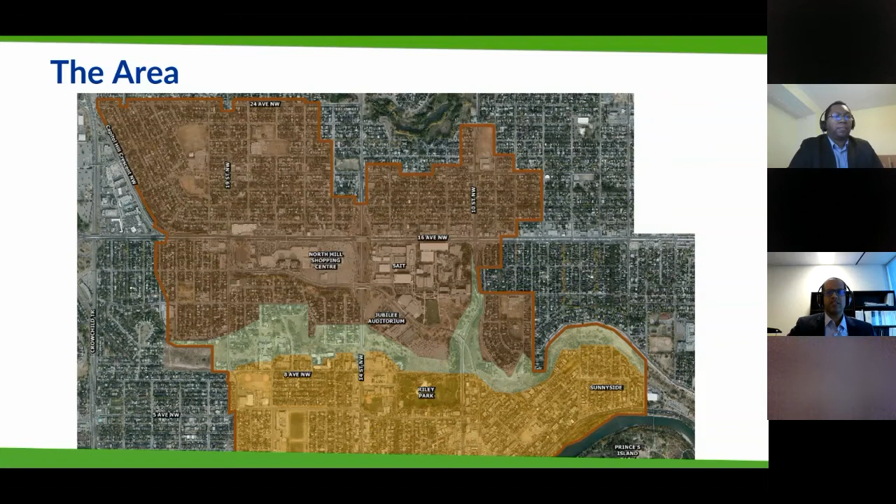This is a large study area within inner city Calgary. It is located just north of downtown, north of the Bow River. The darker shaded area is referred to as the Upper Plateau. The lighter shaded area is referred to as the Lower Plateau. The Lower Plateau lies within the floodplain of the Bow River. The 2 areas are separated by approximately 35 to 40 meters in elevation.

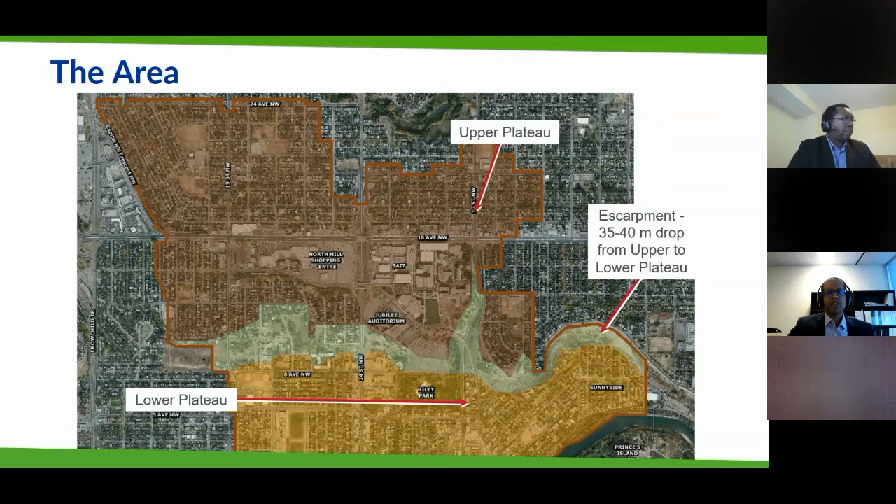Within this study area, the Upper Plateau collects stormwater from an area of approximately 300 hectares with a peak flow of approximately 20 cubic meters per second for the design event. The Upper Plateau conveys stormwater via underground infrastructure that then runs through the Lower Plateau as storm ducts. However, the Lower Plateau's local stormwater system is also connected to the same infrastructure.

As a result, when this system is overwhelmed, regardless of whether the runoff came from the Upper Plateau, the Lower Plateau is the area that incurs the flooding. As the Lower Plateau is within the floodplain of the river, this stormwater infrastructure is also exposed to varying river levels.

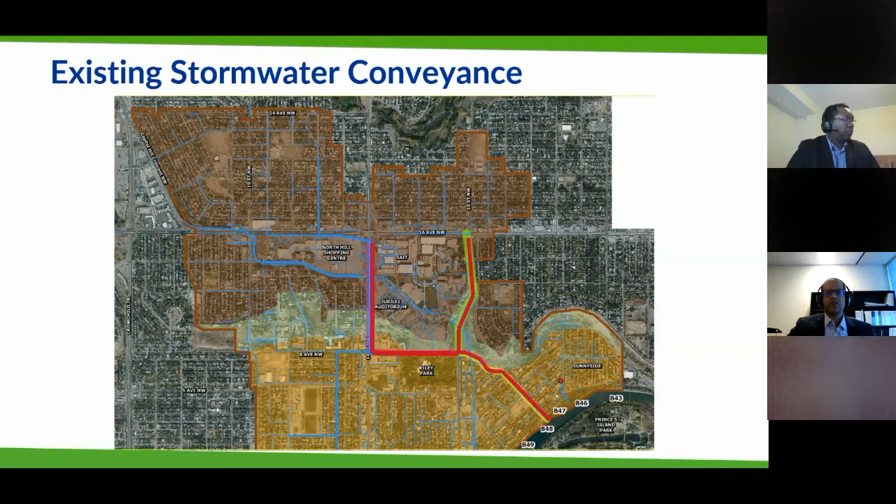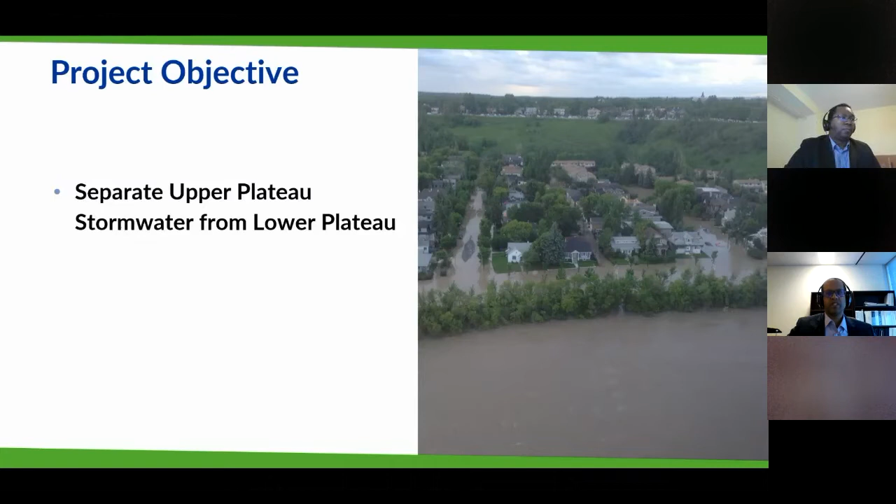The project that we're discussing today had a very straightforward objective: separate Upper Plateau stormwater from the Lower Plateau. It's a challenging objective to achieve, though, given that we're working within the inner city, and one we have been working closely with the City of Calgary to attempt to resolve.

A number of years ago, we were fortunate enough to conduct a drainage study of this entire area. Within this drainage study, we proposed a design solution consisting of a large diameter storm trunk siphon installed via tunneling to convey the flow directly to the river before it could impact the Lower Plateau storm system.

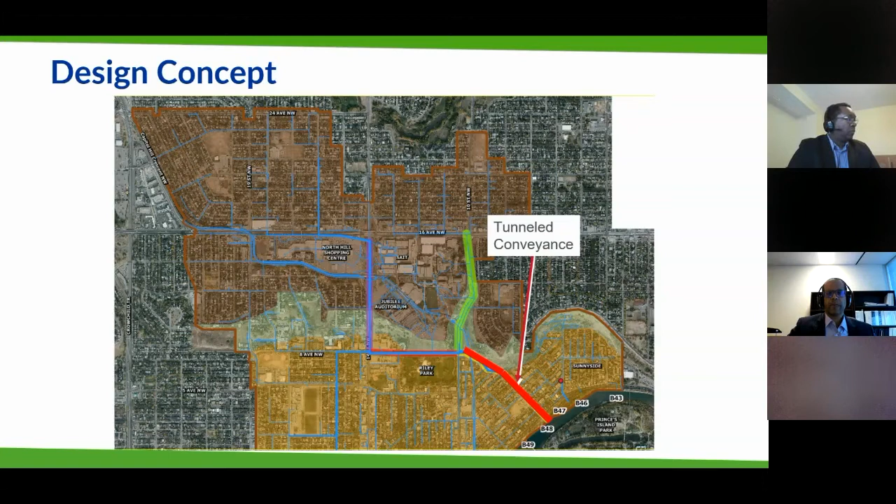During the preliminary design phase of this project, the City of Calgary led a value management session during which multiple potential solutions were raised. An alternative conveyance route for the Upper Plateau flow was considered. However, this route required a much longer installation and required construction of large diameter storm trunk through congested residential areas. This option was deemed too costly and challenging to proceed with.

Storage of the peak flow was also considered. However, the optimal location to implement this storage would be Riley Park, a highly valued public space with many recreational uses and no replacement areas in close proximity. This solution was not carried forward due to the significant social impacts associated with it.

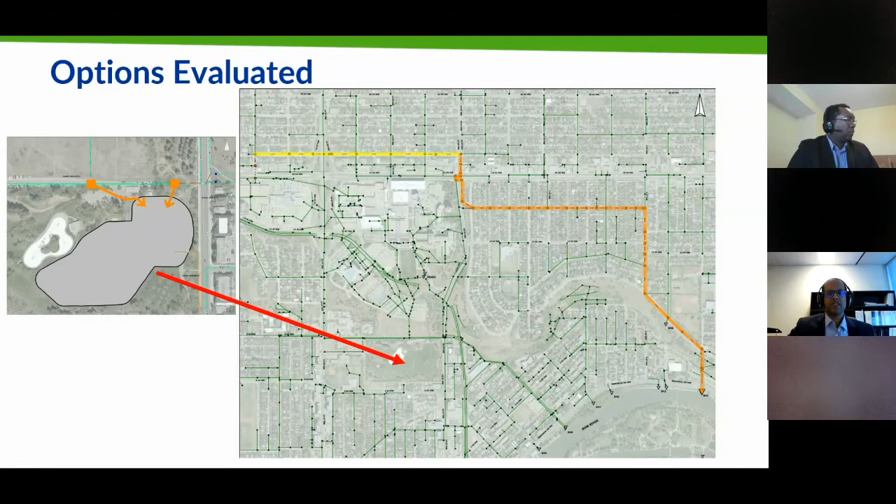Two very different trenchless approaches were also considered. One was to utilize the existing storm ducts to convey the Upper Plateau flow directly to the Bow River while building a new collection system for the Lower Plateau. As Gabriel will touch on in greater detail, this approach would require pressurization of the existing storm ducts beyond what they were designed to withstand.

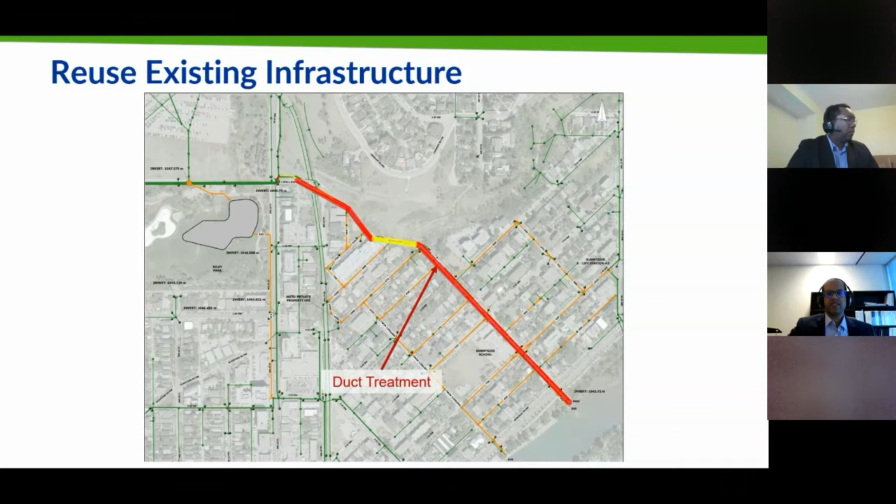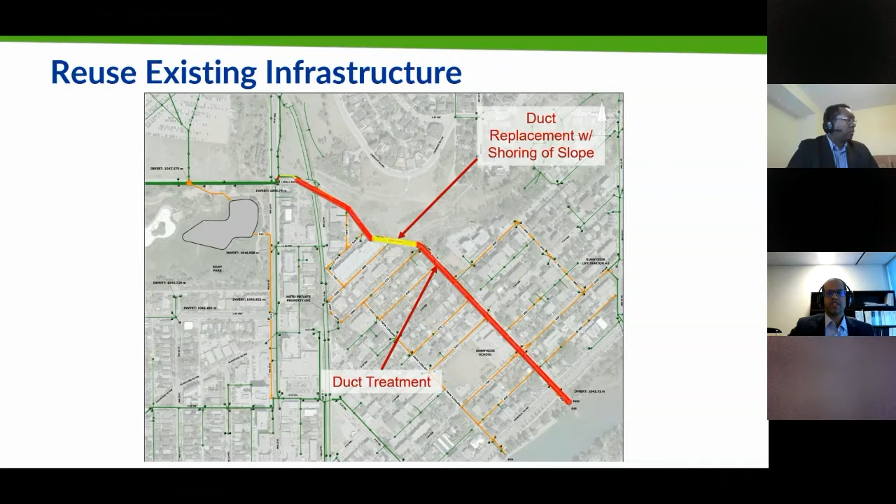This would require treatment of these ducts, shown in red, and replacement of portions of the duct, shown in yellow, and also significant construction within the Lower Plateau system to reconstruct the local collection system, as shown by the orange lines on the screen.

The other trenchless option we considered was an optimization of the trenchless installation of a new storm trunk siphon to convey Upper Plateau stormwater directly to the Bow River. The size of this line is hydraulically dependent, but would be approximately 3.4 meters in diameter to convey the design flow. As a result, this line would have to be installed via tunneling, as none of the available routes had the space needed to accommodate this large a storm trunk through open cut excavation.

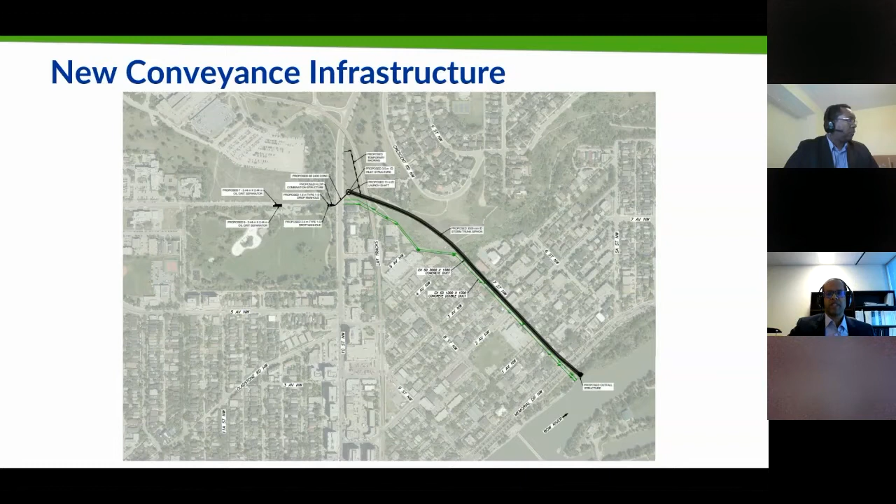Deepening of the storm trunk at this diameter, and then with a length of approximately 750 to 800 meters, we considered tunneling and microtunneling as viable options. A little later on, Gabriel will discuss the specifics of these approaches we considered. At this point, I'd like to hand it off to Gabriel to continue on with the presentation.

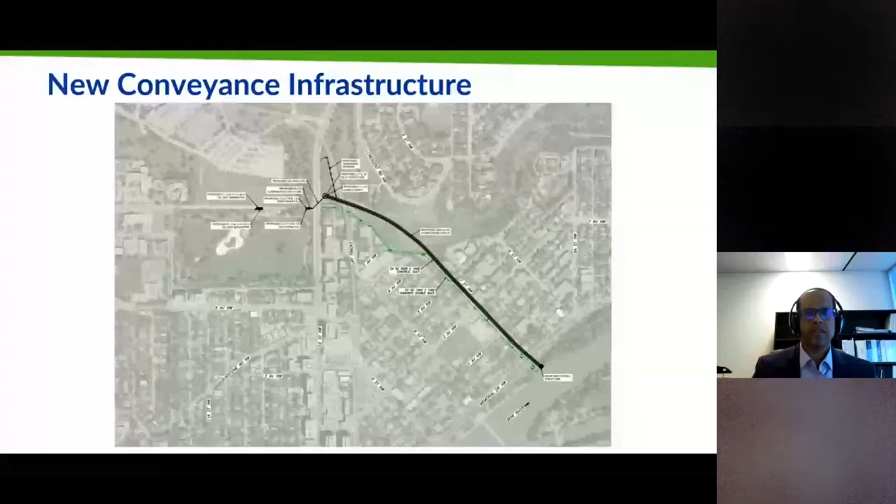Thank you, Nadeer, for reusing the existing ducts as part of one of the options that Nadeer noted earlier. Yeah, sorry about the technical delays here. We'll get this going here, and just appreciate a little bit of patience.

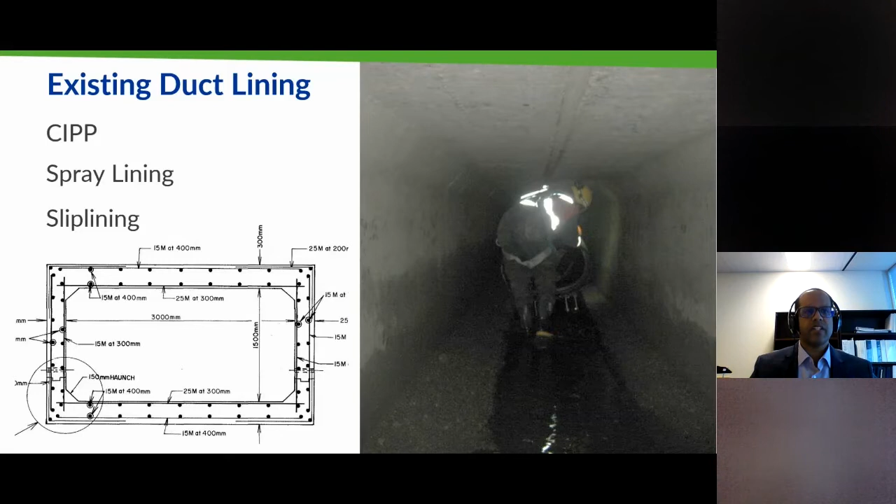Thanks, as Nadeer noted. So when we considered treating the ducts, we looked at various options to line the ducts. And the reason we needed to do that is, for any structural engineers in the room, the reinforcing at these upper corners wasn't designed to withstand internal pressure, certainly not to the extent that we would expect to incur on this system with this design. And the fact that these ducts are shallow also meant that there wasn't much soil loading above to resist the pressures we would experience. So we considered a cured in place approach, a spray lining approach, and a slip lining approach.

The cured in place approach, as some of you may know, consists of installing a lining, as you can see on the graphic, through the existing pipe and conduit, and then inflating that lining to adhere to the conduit itself. The curing process would have it adhere tightly to the conduit it's applied to, essentially forming a new conduit with a smooth interior lining.

So with the CIPP, we looked at a couple of different products here. We looked at an Insituform liner. We looked at an alpha liner, UV cured product. And certainly the products are very suitable in round conduits quite often. Our challenge here was that we have a square and a rectangular conduit to line, and the rectangular conduit was a particular challenge for this type of application, because this particular application isn't meant to stretch horizontally, and what would result is a much smaller cross-sectional area in the conduit, and that conduit wouldn't be able to convey the design flow we needed.

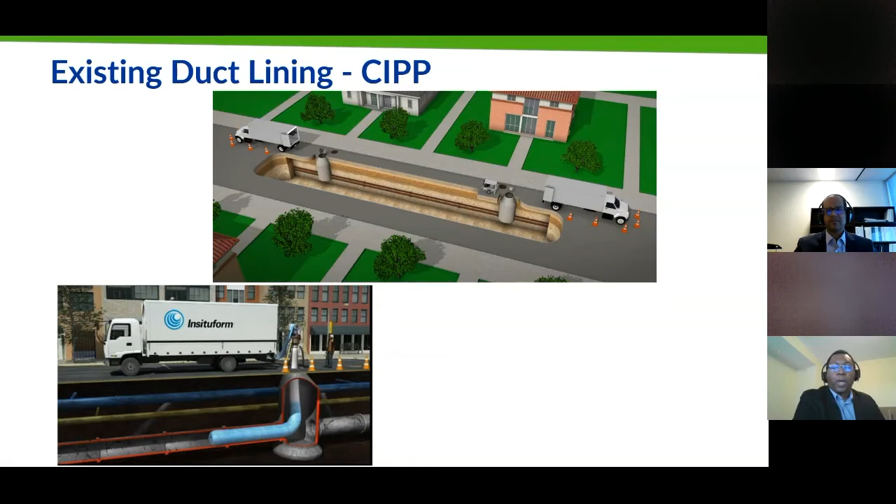The other CIPP option we looked at was from Alpha Liner. It is close to what the Insituform install is, but it uses UV light to cure the lining. It would provide a tighter fit to the duct walls, but as noted for the Insituform installation, it would not be suitable for the 3 meter by 1.5 meter duct. And this is just a picture of what the Alpha Liner would look like.

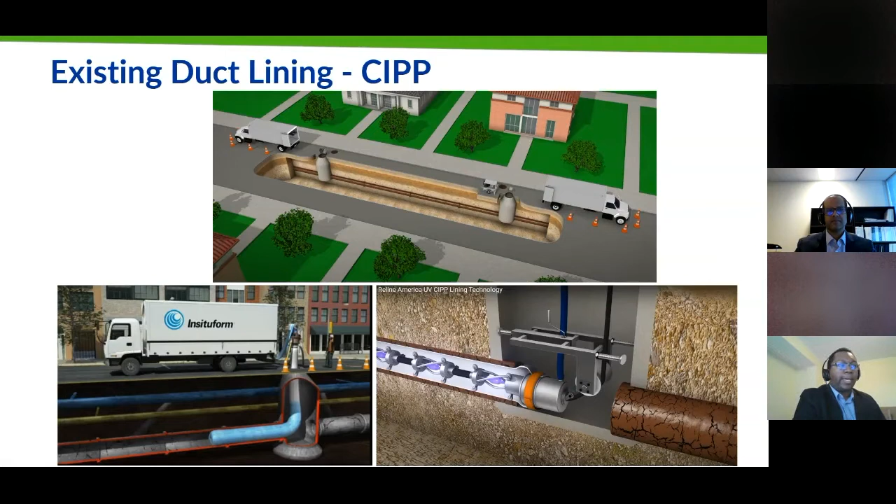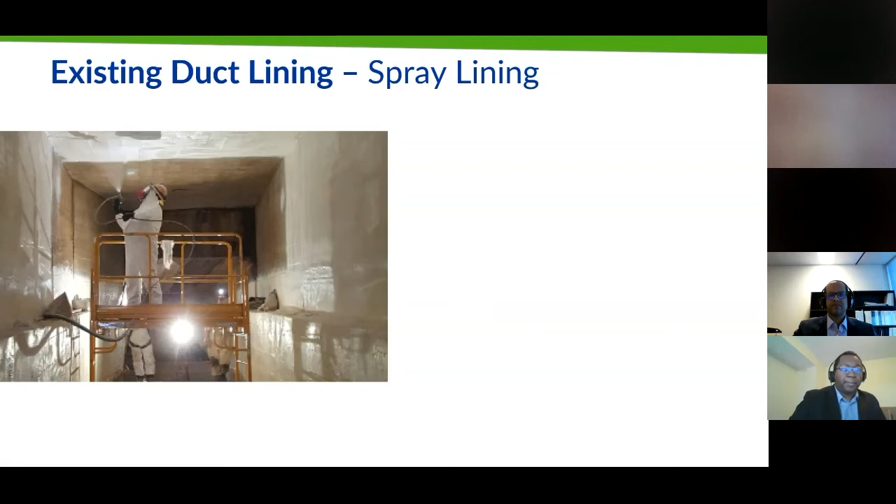For spray lining options, we looked at a two-part epoxy application from a firm called Warren Environmental. We also looked at a GeoSpray geopolymer from a firm called Milliken Geopolymer. These options look really promising, but the vendors that we talked to were not able to confirm that their products would work for this application. This is just a picture of what the GeoSpray geopolymer would look like.

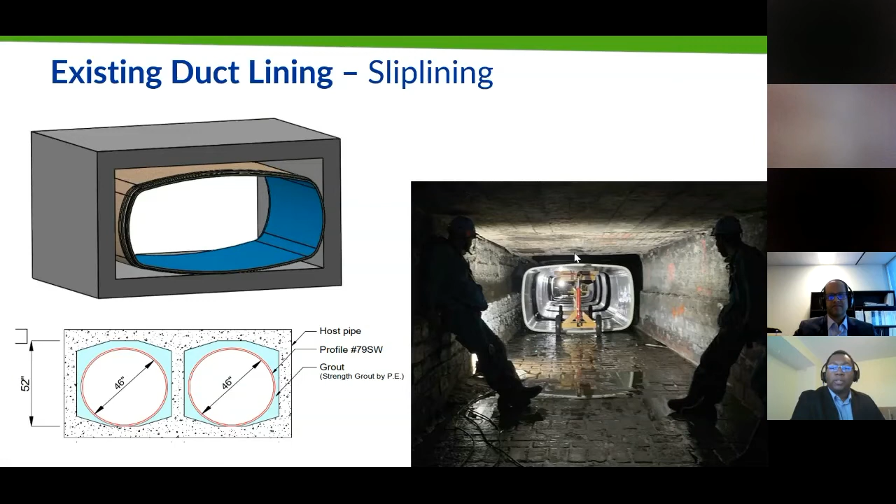Going back to the slip lining side, for slip lining, we looked at glass fiber reinforced plastic pipes from companies called Channeline and Amiblu. We also considered a spiral wound pipe from Sekisui. The reduction in cross-sectional area from these options would not meet the project requirements. So early on, slip lining was not considered any further.

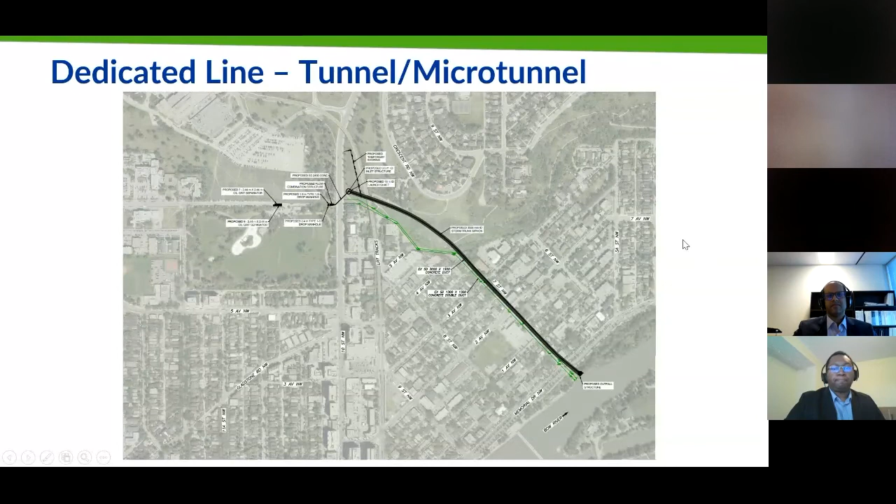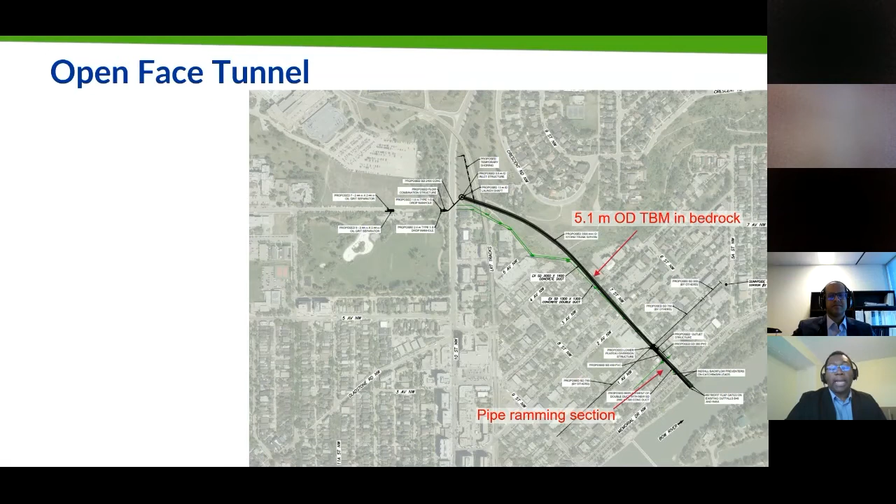We first looked at an open face tunnel installation from 10th Street to 1st Ave Southwest, with the remaining installation done by pipe ramming past the transition between bedrock and overburden soil. The initial tunnel support would be segmental lining or steel ribs and lagging with fiberglass reinforced plastic pipe as carrier. Although the size of TBM will ultimately be left to the contractor, we estimate a 5.1 meter outside diameter for the TBM. This is just showing what the FRP would look like, as well as the steel ribs and lagging.

The open face tunnel option has some challenges. We would need a shaft at the cul-de-sac at 7th Street, north of Memorial Drive. The shaft would be close to houses and condo buildings. It would be noisy, even if measures were taken to minimize the noise. The size of casing for pipe ramming would be challenging, and it would stretch the limit of what local contractors can do.

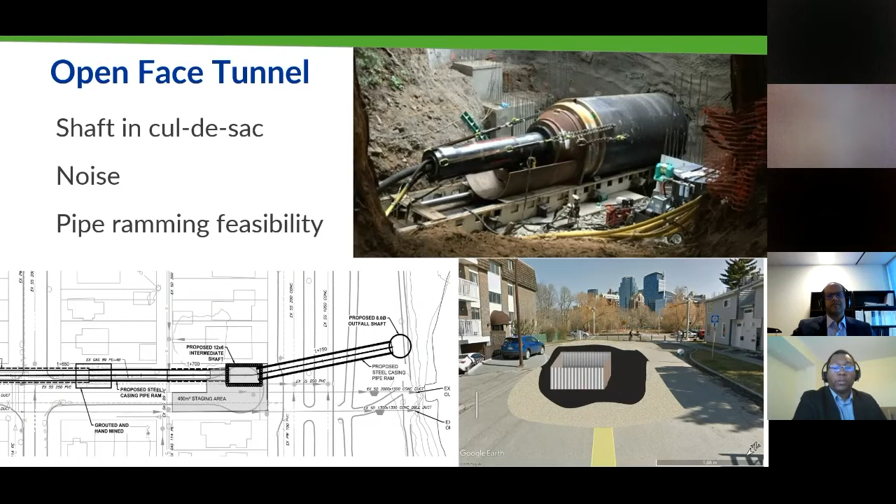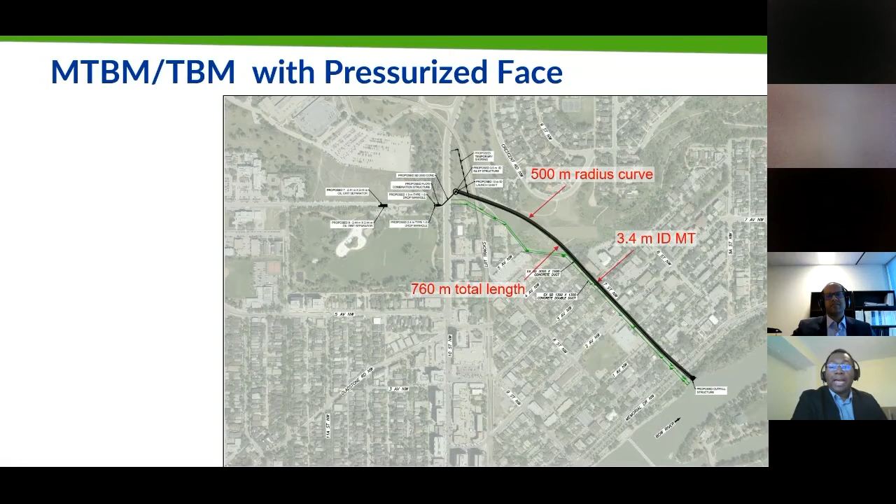We also considered a microtunnel installation with a 3.4 meter ID. The carrier pipe would be a concrete jacking pipe, seen here. The MTBM is able to advance in mixed ground conditions and would not require a change in method along the alignment. A 3.4 meter ID MTBM would push the limit for this type of application. A TBM with a pressurized face was also considered and would be suitable as well.

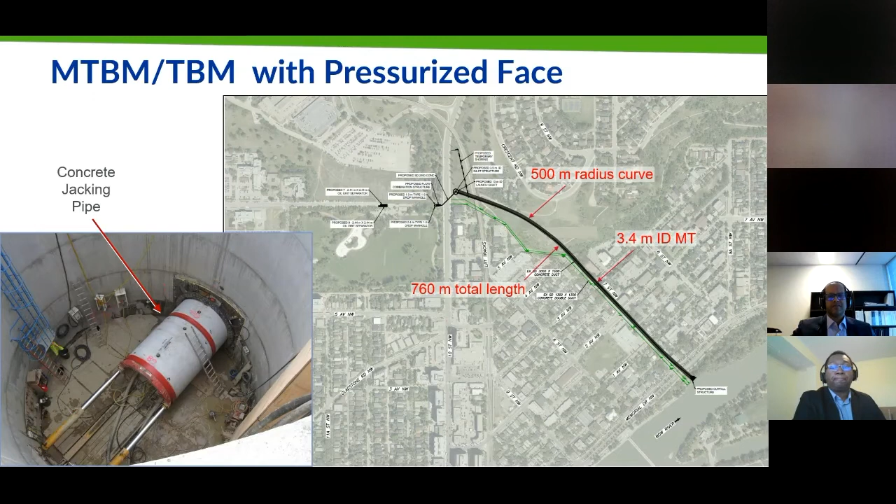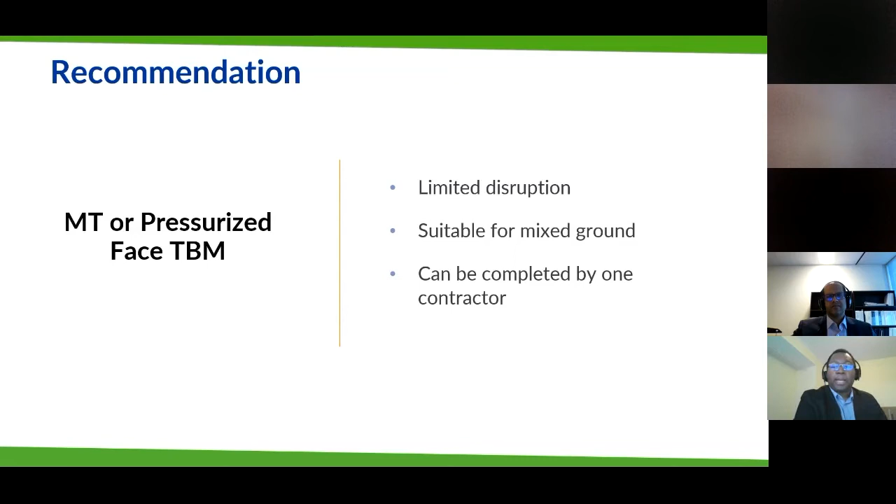After assessing all the trenchless options, our recommendation was for MTBM installation or TBM with a pressurized face. It offers limited disruption to the community, is suitable for mixed ground conditions, and can be completed by one contractor. With that, I will pass it back to Nadeer to conclude this presentation.

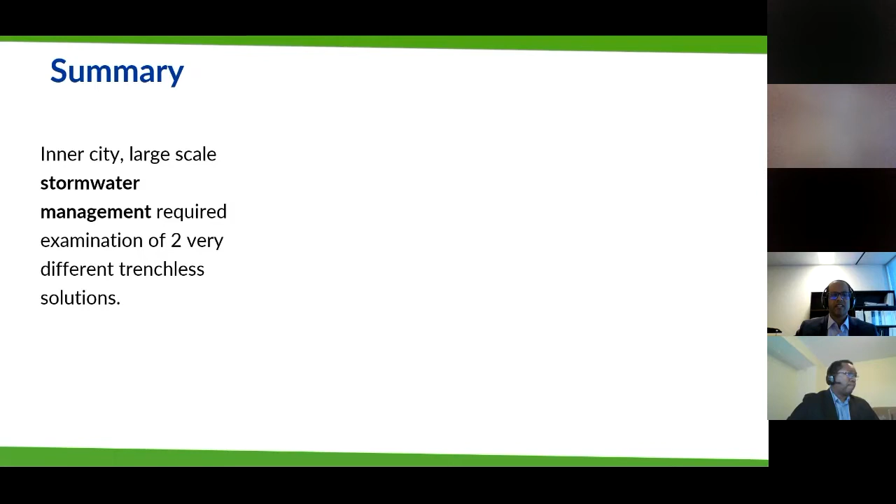Thanks, Gabriel. So in summary, large-scale stormwater management in inner-city Calgary required us to examine two very different trenchless solutions. We considered repurposing infrastructure to convey pressurized flow, and that seemed promising. But as we delved into the details, it proved to be challenging and beyond the limits of what could currently be provided on the market. It turned out that in this case, tunneling and microtunneling was the appropriate solution.

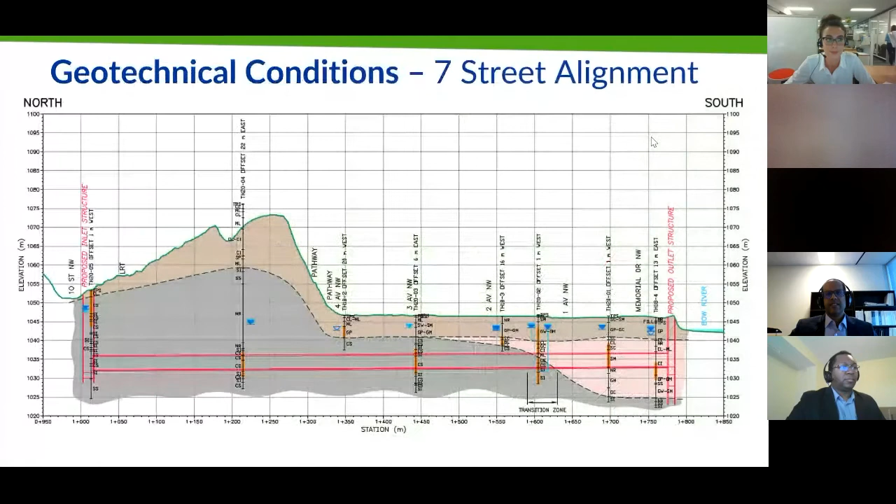So the need to separate the stormwater originates from the fact that the stormwater from the Upper Plateau area was contributing to flooding in the Lower Plateau. And so the goal of this project was to separate that Upper Plateau stormwater from this Lower Plateau system. And certainly the ducts that go through the Lower Plateau here have a reasonable size to them.

Where we were challenged is we needed to force this flow into the river using hydraulic driving head, and we're also subject to varying river levels. Those conditions would subject any conveyance of this flow to an internal pressure that could reach 9 or 10 meters of head. And these ducts weren't designed to withstand that.

The upper corners of the ducts are fairly light in reinforcement, and after we conducted a structural analysis, pressurizing the ducts to that extent would, as that pressure was generated, form cracking of the duct and eventual failure over time.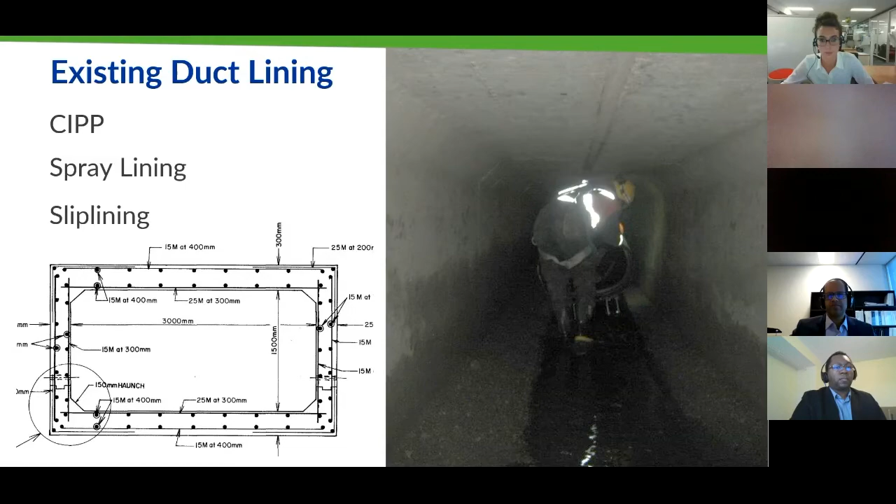Our second presentation of this session is on the Groat Road Sliplining project. This project includes 4 kilometers of large diameter storm trunk under a high traffic arterial road in the City of Edmonton, which is known as Groat Road. Our presenter is Jason Lueke.

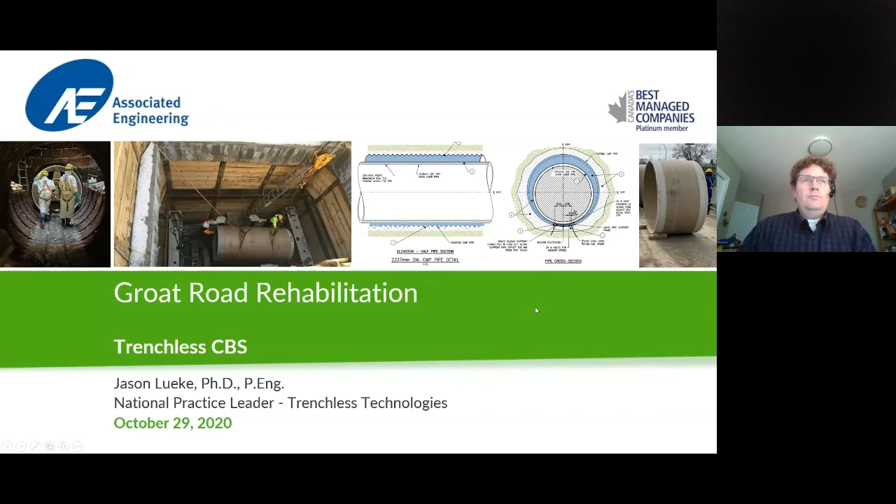All right, so a little bit of an outline of the project. We'll give a brief background, talk about the RFP and the tender phase, then discuss Part A design, Part A construction, Part B design, Part B construction. These will make more sense once we get into the background in terms of understanding how the project was divided out.

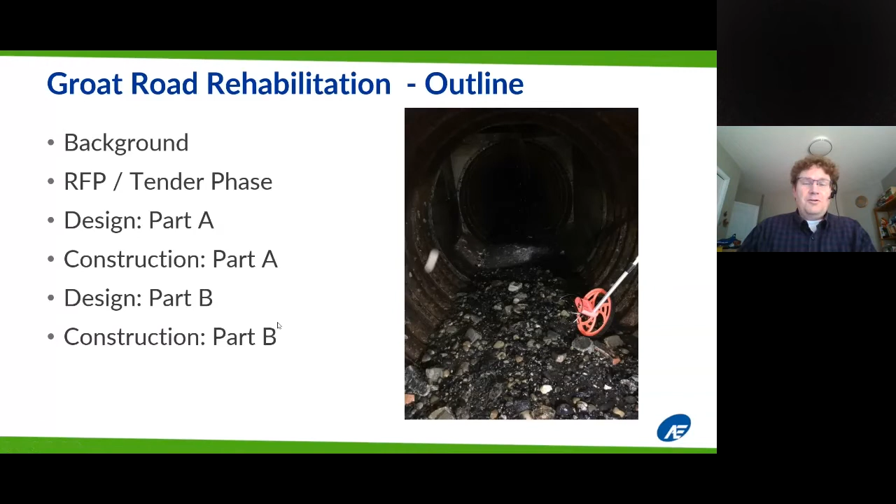So a little bit of background. The Groat Road storm trunk is in the Groat storm basin, a relatively large basin in the city of Edmonton, encompassing approximately 1,844 hectares. We've got some industrial areas, lots of residential, commercial. The trunk itself is about 9.9 kilometers, and the portion we're working on was installed in 1953 to 1955, and ranges between 7.6 and 17.6 meters in depth.

This was constructed by hand tunneling, and the trunk itself was a liner plate, multi-plate configuration of corrugated metal bolted together. The project was divided into two portions. Part A was approximately 1.8 kilometers of 1,700 diameter corrugated metal pipe to be rehabilitated. Part B involved 2.2 kilometers of 2,300 millimeter diameter corrugated metal pipe to be constructed or rehabilitated.

The manhole connections were also part of that rehabilitation program, and there were several drill drops. For those outside Edmonton, the city has a lot of these deep trunks due to its topography. The North Saskatchewan River bisects the city at a relatively low elevation, with tablelands on either side, and we need to get the stormwater from the tablelands down into the river. So deep trunks in Edmonton are not uncommon.

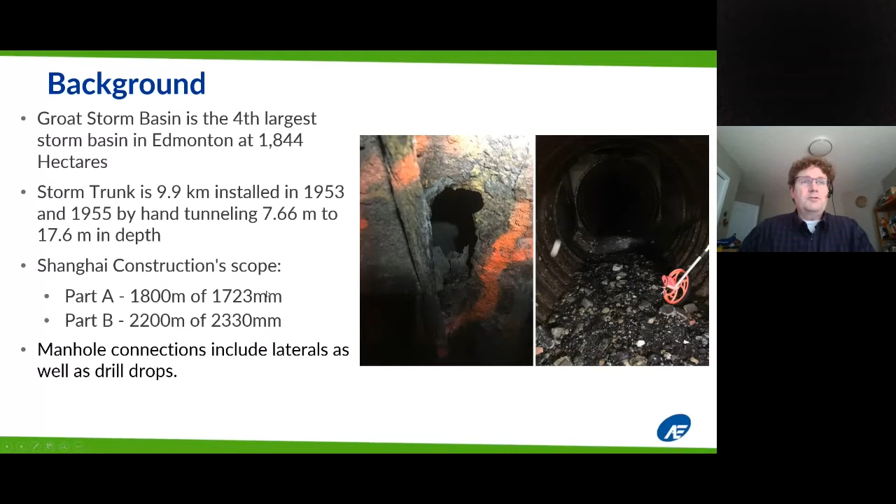Background. All right, so EPCOR's, or City of Edmonton's, I'm just going to say EPCOR now, because at the time it was City of Edmonton. But Stantec at that time, they did a lot of work. They went through and did the inspection of this pipe in 2012. I think it was EPCOR at that time. And they identified it as requiring repair. Lots of voids were found outside the pipe due to the corrosion. Water's getting in and out and washing out a little bit of the fines around here. The soil here is a glacial till, so it wasn't too bad in terms of granular, but there were voids that were developed every so often.

In 2014, 2015, there were multi-sensor inspections completed, essentially to get an idea of what the condition of this pipe was in terms of ovality. And, in general, the majority of this pipe had ovality less than 3%, which isn't too bad when you consider the age and the material here. But there were a few locations where the ovality was in excess of 5%, and that typically is not a good thing. Measured wall loss ranged from 13% to 69%, and lots of them had more than 30%.

And so you can take a look here, and this is Shanghai guys. They're fully suited up doing the walkthrough. And you can see here, hopefully you can see it here, that the bottom of this pipe was corroded out. And so as they're walking through, they're probing to see what's the condition. In a lot of cases, there was no bottom here left. A lot of the debris that went down the storm trunk would accumulate in the bottom and make it fairly firm. But there were some places where there were larger voids that had to be fixed before other rehabilitation was done.

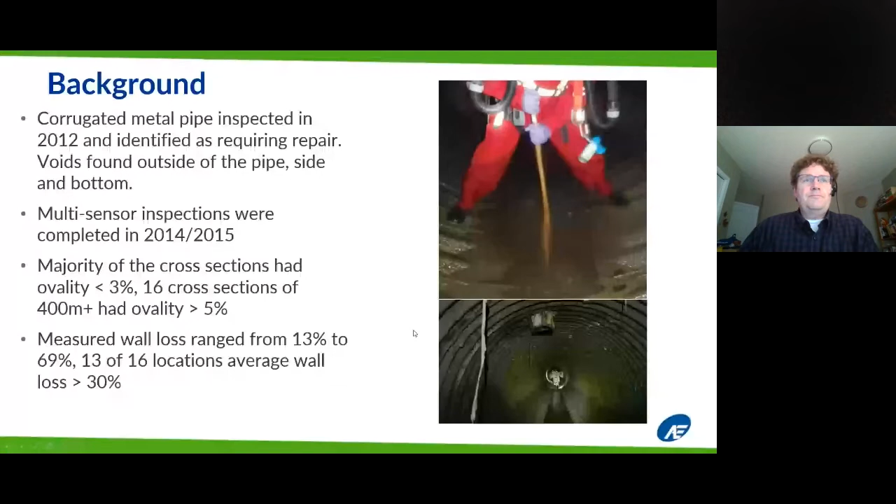So the background, north is to the right. If you're familiar with City of Edmonton, you have St. Albert Trail and Groat Road. You got Westmount Mall, 107th Avenue over here. The blue line represents the trunk. And then going vertically on the page, which is east-west in reality, we have the trunk going on 118th Avenue. So Part A of the project was essentially everything on 118th Avenue. Part B was from the Groat Road circle down south to 107th Avenue. South of 107th Avenue, the city had already rehabilitated that section, and so we were tying into an already rehabilitated piece of infrastructure. So almost about 4 kilometers of trunk to be rehabilitated here.

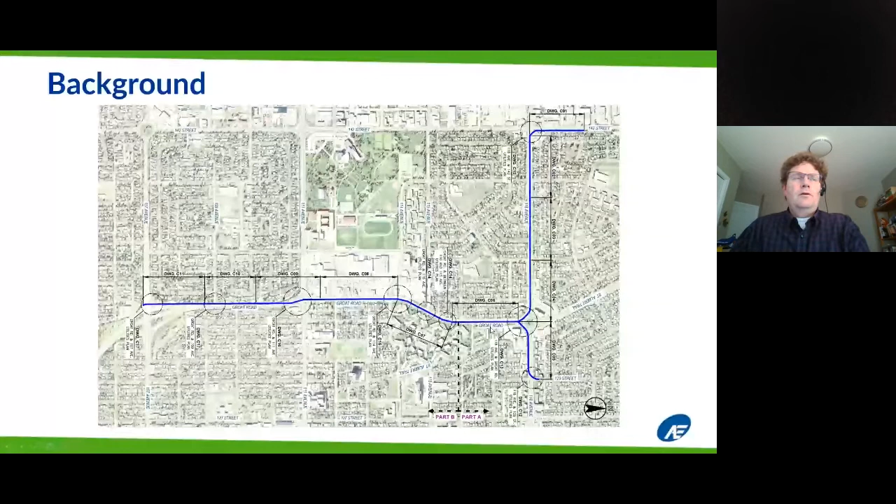Okay, so City of Edmonton, Stantec put out the RFP tender here. They looked at various different technologies and techniques to rehabilitate this. They evaluated 14, and they also looked at replacing the trunk. They went through a value engineering process resulting in 4 technologies being carried forward: sliplining, spiral wound, centrifugally cast concrete pipe, and cured in place pipe. They put out an RFP. Shanghai Construction teamed with us, or we teamed with Shanghai, and we submitted proposals for both sliplining and spiral wound.

In the end, EPCOR and Shanghai negotiated, and they ended up being awarded Part A initially. And essentially Part B was contingent on the performance of the contract. And ultimately, Shanghai was successful, and almost at the completion of Part A, they were awarded Part B.

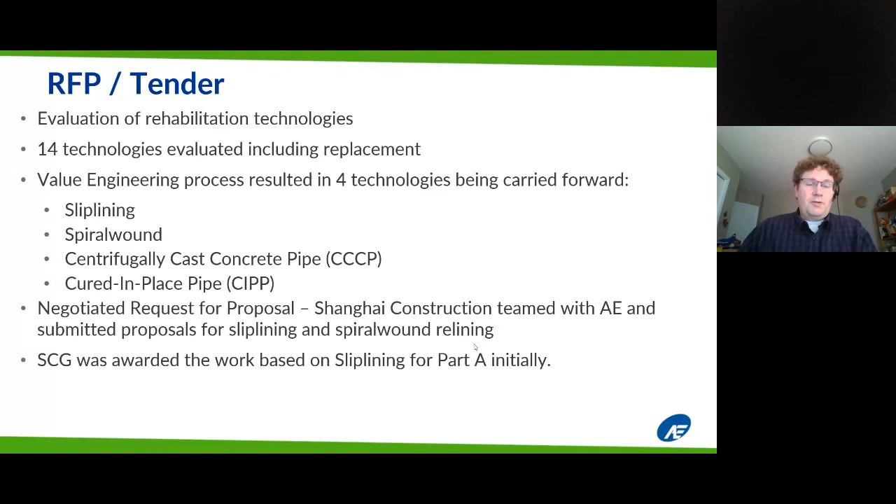And essentially on Part A, there was a total of 4 shafts. We have shaft 1, which was a slide rail shaft. And from shaft 1, they would put in a sliplining rig. Akkerman makes this rig. It's a tool which essentially has some hydraulic jacks, and in the back end has almost like a big spatula that you can load in sectional pipe, and the spatula just pushes the pipe down the tunnel, or down the CMP pipe.

So they use the sliplining rig from shaft 1 to push pipe south, approximately 273 meters. When we get through these bends, we can't push the pipe through the bends, and so we had to do manual installation here where from shaft 2, the crews would come in and put in segments of pipe and basically carry it on trolleys and by hand into the shaft for placement.

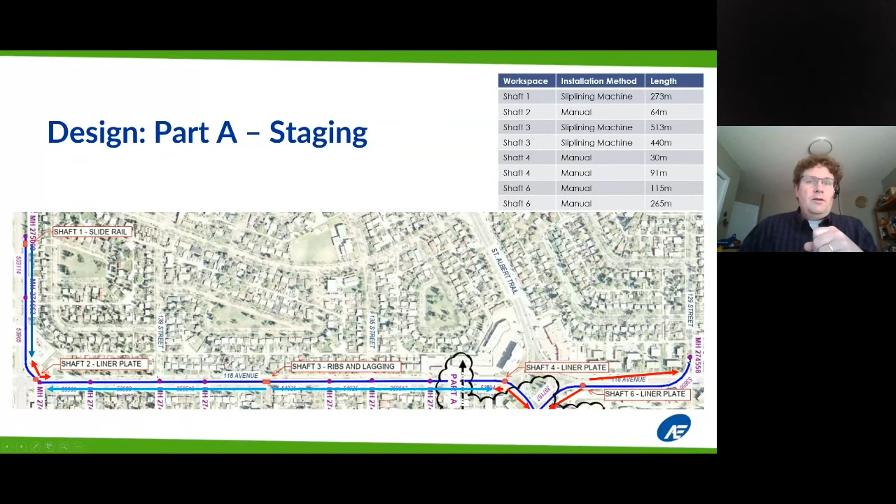And then there's another shaft over here just to the east of Groat Road on 118th Avenue, 115 towards the traffic circle, 265, sorry, through the curve up to this manhole. So that was a plan. And so now we're working with Shanghai to implement this solution.

So one of the things, as part of that plan, was to use Hobas pipe, fiberglass reinforced pipe, to do the sliplining application. And Hobas is widely used in terms of sliplining applications. But we still have to go through and do the design checks. And so using AWWA standards, we go through and do the buckling checks, the combined strain analysis, the deflections, ring deflection, pressure class, all those kind of things, and determine what the wall thickness of pipe we need to actually use for the relining of this sewer.

Part of that design process, though, is understanding that installation process. And there was a grouting program that needed to be done, because once you get the pipe in place, you do have to grout it in place. And so part of that design was incorporating what the grout pressures would be, so we don't buckle the pipe. And so that was a very important component of that design.

Here's some couplings, and then the jacking loads are also calculated, because if we're using the machine, we have to push this pipe in, and Hobas, the fiberglass pipe, is a jacking type pipe. You can use it for microtunneling operations as well. So again, it's a routine type installation. For a sliplining application, the fiberglass pipe is a lot thinner than it would be for the microtunneling operation, because we're not pushing a microtunnel boring machine on the end of our pipe string.

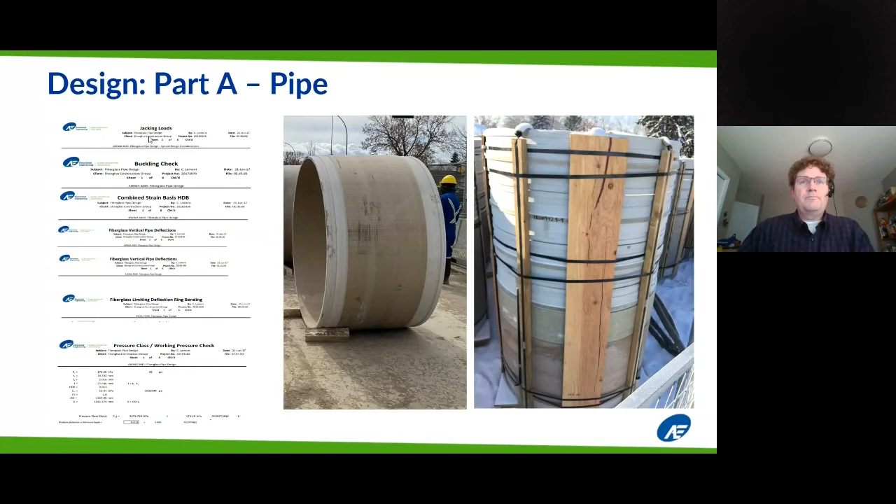To get the pipe into place, the corrugated metal pipe is a little bit like Velcro. It doesn't allow you to push things through it very easily with all the corrugations and the bolts sticking out. So we had to devise a plan, and I think it was through a little bit of value engineering, we came up with the idea with Shanghai, or I forget who it was, about putting rails. And we have put rails.

We designed rails that could be, I forget what the length of these were, but they're assembled in pieces that the Shanghai crews can carry down into the tunnel, put together, and this would essentially form a stable base to allow the pipes to be pushed or to sit. They would keep all the pipes in line with each other, nice and straight. And then also a trolley was made that would ride the rails, so to speak, to assist in placement of the pipe. So this is what our structural engineers did, figure out what these rails would be, come up with configurations, how to put it together.

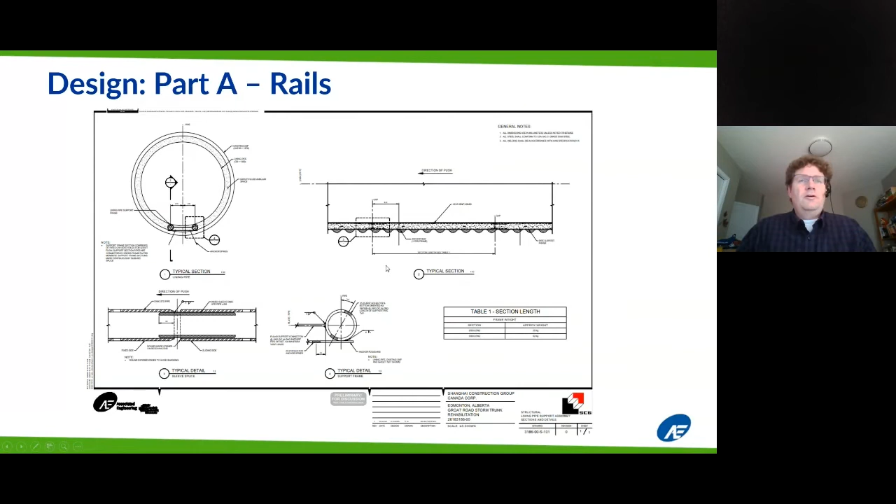And of course, with the corrugations, what kind of helped, as you can see here in the cross section, is that the rails just sit on top of the corrugations, and when you do the grouting, the grout would still be allowed to kind of get around underneath the pipe. And we also put in air holes, and it was almost like a ladder that was devised and laid down to still allow the grout to freely get around all the FRP on the grouting installation.

Additionally, there were curves, and on the drawings, the curves looked relatively continuous, but in reality, they were basically, I think it was like 15-degree bends, very discrete, and so there were some issues there.

And so, the team implemented 3D scanning to go through the tunnel, so we could get an idea of what that looked like, and then that was translated into a Civil 3D package, where Mr. Lamont and Stuart in our Edmonton office devised a lay schedule essentially, so that they could put together what lengths of pipe were needed. And I think it was like 300, 600, 900, 1200 lengths of pipe were cut.

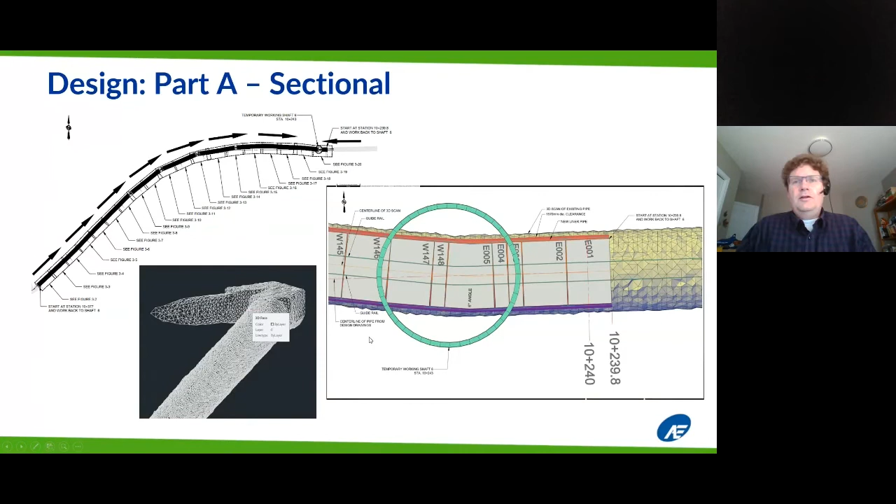And so every piece of pipe going through this tunnel was put in a particular location when it was put in by hand, so that we could make joint deflections work around some of these bends. There were some specific pieces you can see here. I think this was a specific piece that was ordered from Hobas. It came with a bend, but where possible, we would cut the pieces of pipe to allow joint deflections to occur, as opposed to putting in fabricated bends. Construction in Part A.

All right, so getting off to start. Part of that was to get in and clean the pipe and get it prepared. You can see here one of the conditions, looking at the amount of debris that's in the bottom of the pipe. A lot of this was flushed out. There was a company out of Winnipeg that came out, Unijet. They got some very large equipment, high volume, high pressure, and they were able to flush the majority of this out of the trunk. But some of it did have to be hand bombed and taken out in buckets, just because of the large volume and the larger debris that was still in the tunnel.

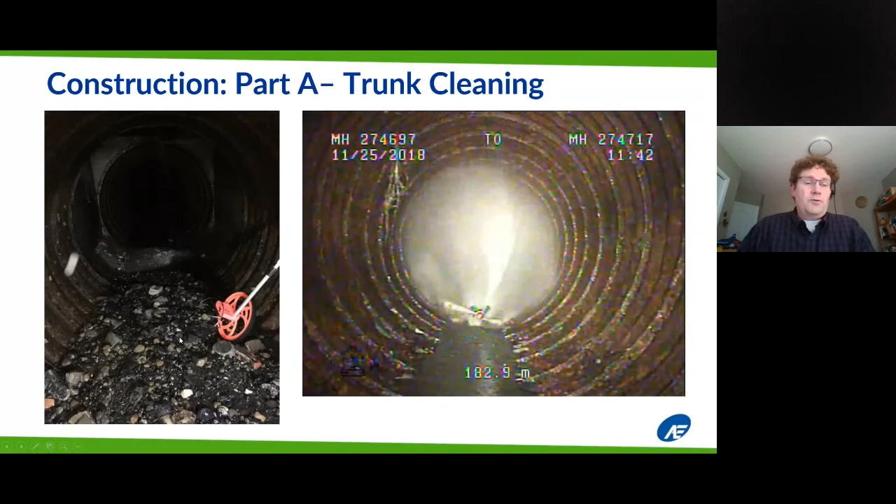Once that repair was done, you can really get an idea of what's going on at the invert. The design had a multi-step process. There was an invert paving type operation, so that we could get the pipe locked in and get a nice stable base to work on. Then there was void grouting, trying to grout the void between the CMP and the soil. And then there's the annular space grouting, which would be the grouting between the FRP and the CMP pipe.

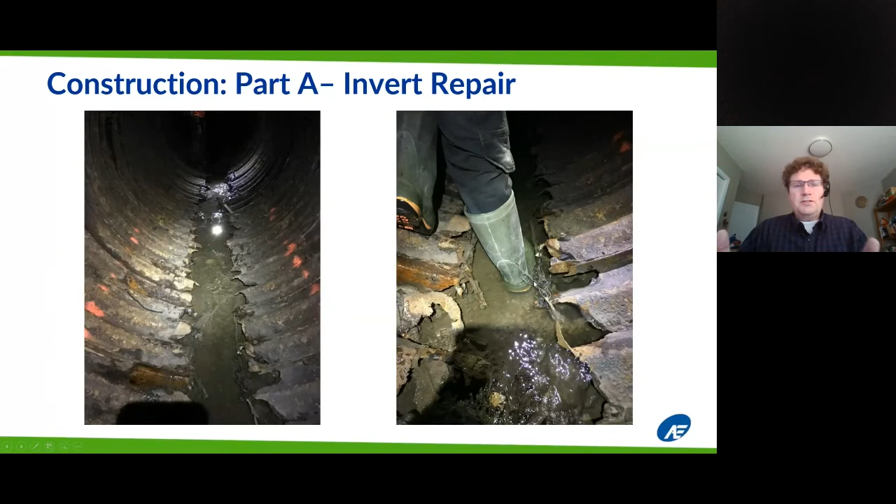But here's just an example of the condition. I don't think all of it was like this, but there were definitely some locations where the bottom of the pipe was absent, and then this had to be filled up with the pavement. It was just quick set concrete to lock everything into place. In some locations there were voids, and gravel was brought down with some geotextile fabric to make a stable base before the grout pavement was put on top.

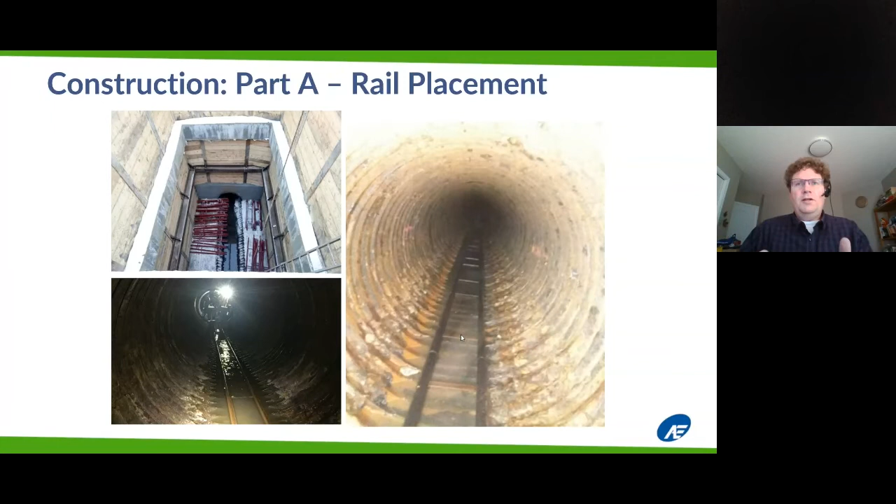There were inspectors on site that would periodically have to put more grout ports in, especially if there were a lot of holes in the pipe. The Shanghai guys went through and patched the holes as best they could. But in a lot of cases there were just so many holes that as you're doing the pressurized grout, it would just be coming in everywhere. I forget off the top of my head what the pressure of the grout was, I think it was like 7 or 10 psi. But it would be coming out all over the place just because of the holes.

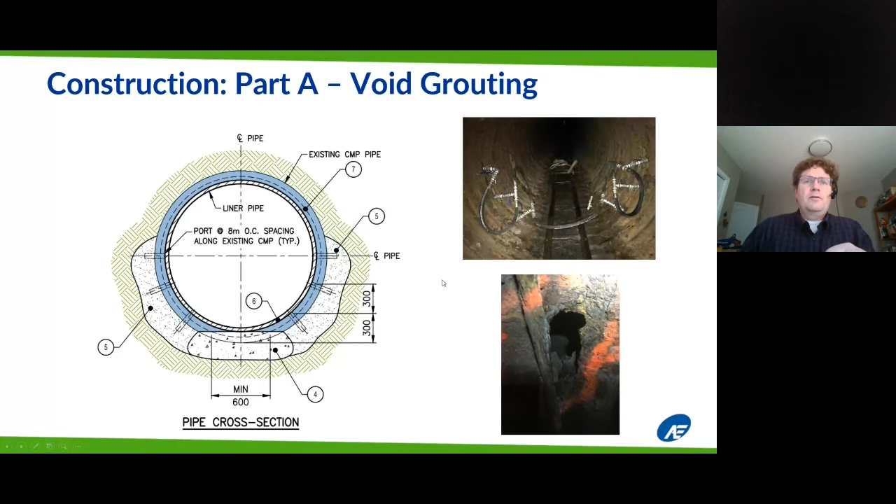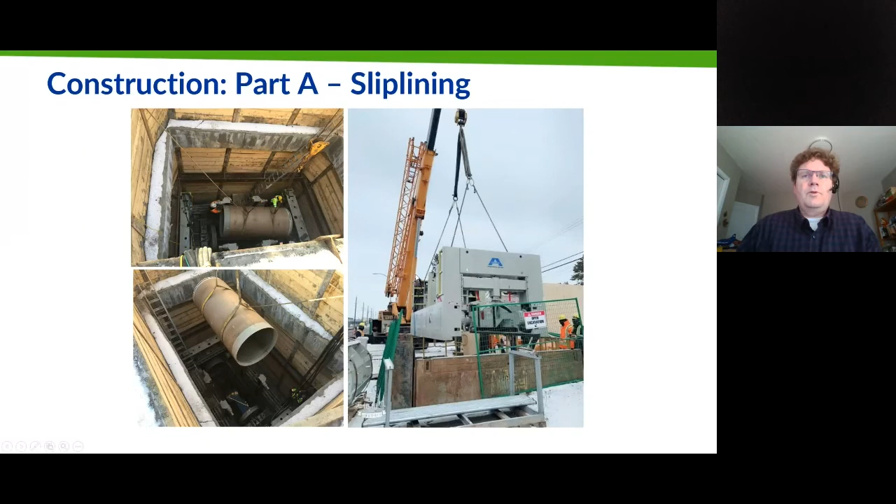rails. Okay. So part A went through, and I'm trying to remember the time here. I think it was about 2019, I believe, when part A finished, and they started on part B. So part B has been going on for about a year and a bit. So part B was down from the Groat Road traffic circle going south down Groat Road to 107th Avenue. This was done with a series of working shafts.

We had working shaft 5, 11, 14, 15, 16, 17, based on manhole numbers. There's other manholes that had to be rehabilitated along the way. But part B was just because of space restrictions. There was traffic issues trying to work within, minimize the lane impacts. The decision was made that all of this pipe here, approximately 2.2 kilometers, would be hand bombed.

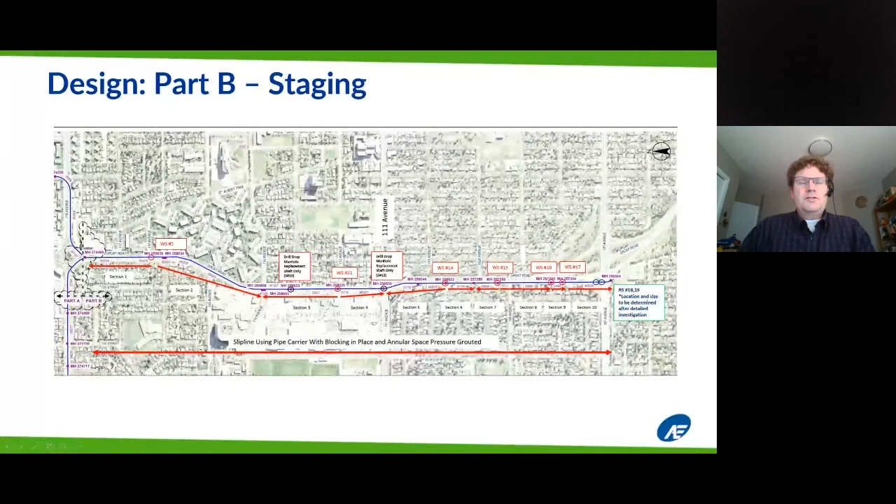And so this is 1,800 diameter pipe, more or less. And that would be put in by hand from these shafts. And you can see, from shaft 5, it was pushed to the north, through the south, through the bends, through this bend here, again, north and south. And so that was the plan.

And in order to do this, though, I'll show you some stuff we had to do, but this here is the Part B inspection. So after the plan to award Part B to Shanghai was kind of made known, Shanghai went through Part B and did a visual inspection again. They had a portable mandrel that they brought through to, again, just make sure that the pipe that was going to be ordered would fit through.

And there were some areas of concern. You can see a little bit of settlement here and some ovality issues. Here's a picture of a drill drop, so the pipe has actually slipped down, and I forget the exact location where this was, but obviously there could be potential for voids up here that had to be addressed.

And then this here is just kind of a realignment, and I don't know the exact nature for it, but I suspect that because this was a tunnel installation, maybe there was tunneling from the north, tunneling from the south, and then it just didn't quite line up. So there was a little bit of a transition where this couldn't be slip lined through, and a shaft had to be put here specifically to allow a prefabricated joint or a fitting to get in here to make that transition.

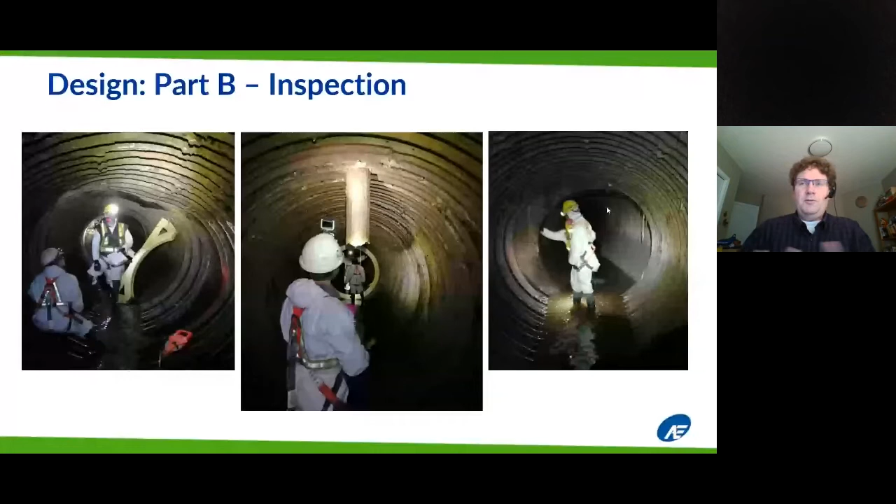So again, this is the entire length from the Groat Road traffic circle down to 107th. And again, we put together a lay schedule all the way through to determine where these pipes would be sitting. We can see here, there was pipes that were cut to be 1.5 meters, 0.4, 0.9. We had prefabricated bends at different angles, right? And so we developed a lay schedule for the entire length around here. And then that's what Shanghai used to follow and put that pipe in place.

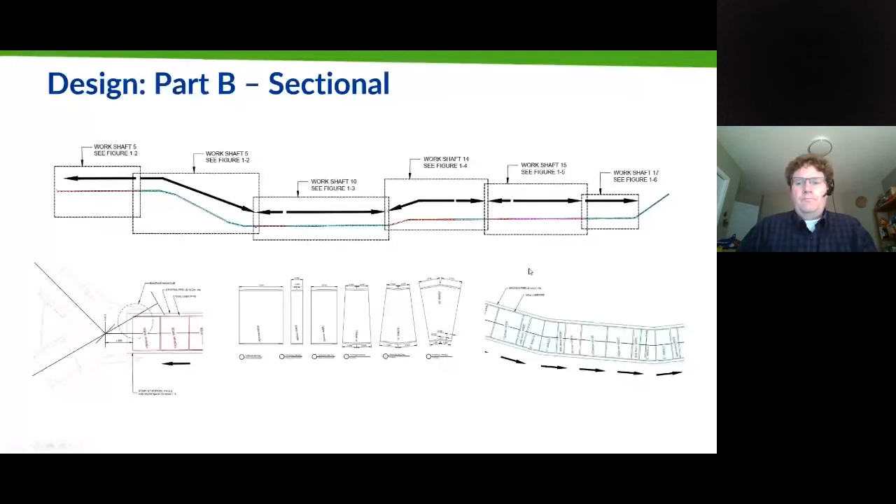A little bit different approach was used in Part B, knowing that there was a lot of issues in trying to do the grouting with all the holes in the pipe. We went through and did the paving here. Now we go into the grouting. A little bit different approach, knowing that before we had a lot of issues with the voids in the pipe. I'm going to talk really fast so we can get through this. A lot of voids in the pipe, and so we came up with a little bit different approach.

Put the rails in the invert paving, and then put the pipe on top, and then we would actually grout in segments, and the segments would vary upwards of 10 to 100 meters, and basically construct bulkheads and do pressure grouting. And we developed a table here that would allow Shanghai to figure out what pressure they needed to actually allow the grouting to take place. And through this process, we're able to pressurize that annular space, and it would push grout out into the voids outside the pipe.

Periodically, I think Shanghai had to go in and maybe make some holes where the pipe was in good condition. In a lot of places, there were enough holes in the pipe to allow the grout to get out. And this here I think was just a little bit more of a more elegant solution in order to make this work. So yeah, a little bit of a change in Part B.

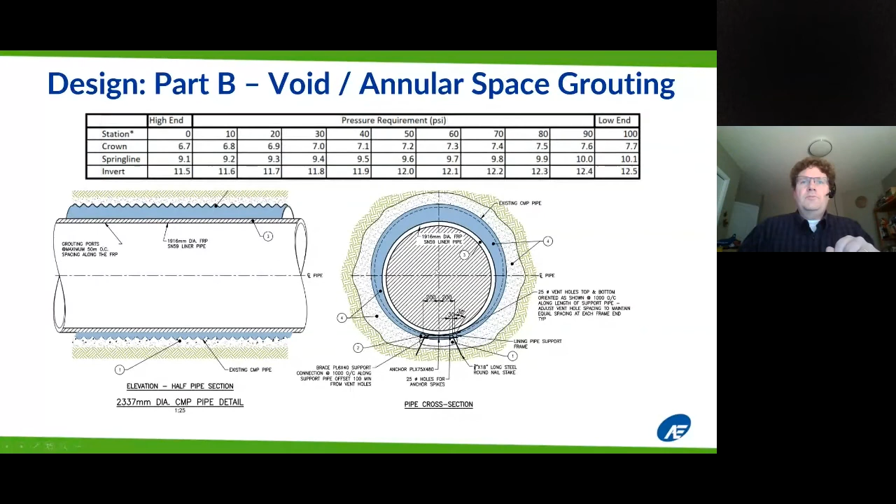Again, there were other things we had to do in terms of putting together manholes, structures, and some structural design. So this here is a particular, I forget which manhole this is. I want to say it's manhole 10, but I might be wrong. So there were some drop replacements, and there were some definite issues in terms of trying to do bypass on a trunk this large, and especially where there were access points.

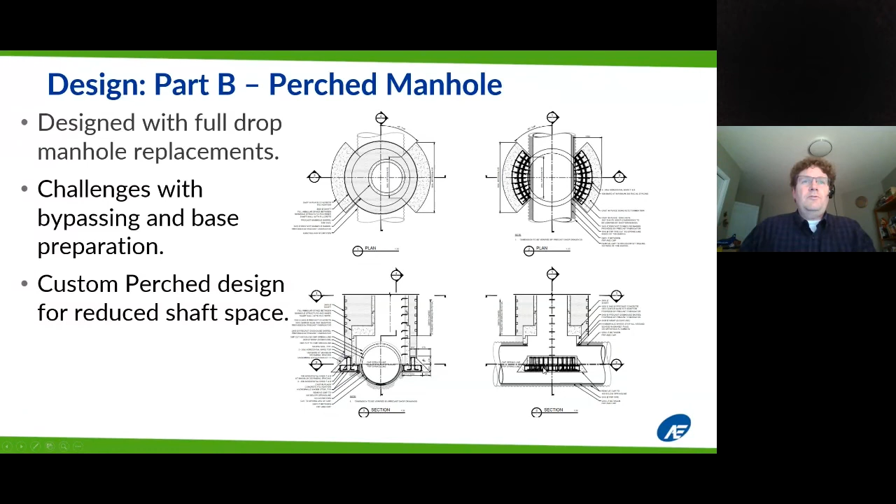And so the idea here was to design these perched manholes so we can do the rehabilitation, do the grouting, then come back in and build these manholes, T-risers essentially, over top of the pipe. So you can kind of see here the configuration, and it's kind of a weird configuration because there's shafts here. And in order to make this work, we had to do a little bit of undermining of the shaft to allow space for the concrete placement and this wedge to be in here to get on some kind of firm ground. So we did a few of these along the way, so some custom structural design.

Part B, construction. You can see here going down a liner plate shaft, putting in some pipe. This here's a larger diameter Hobas pipe. You can see that coming in. Due to the workspace restrictions, there were some issues in terms of staging, so pipe was brought to site every day, staged so that it was just-in-time delivery, so the pipe could be installed and we're not taking up a large space to do work.

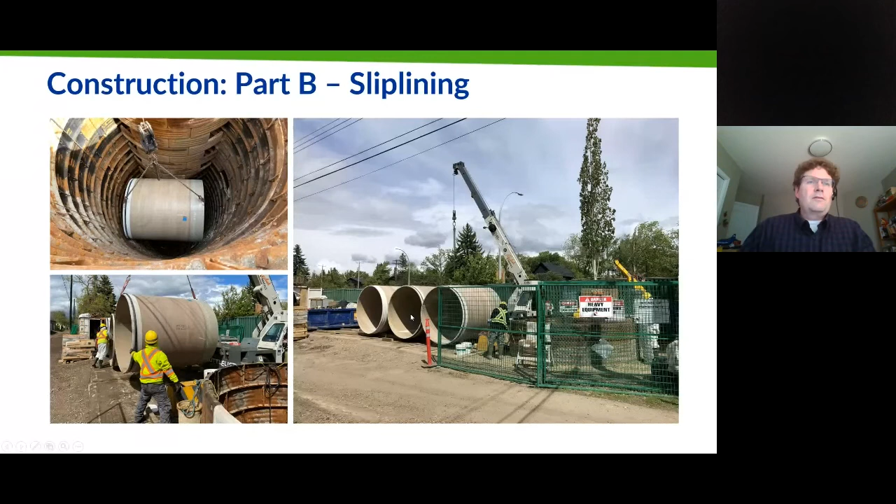Here we can see sliplining, we can see the tugger going in there to put the pipe in place, and so all the joints had to be pulled together to make sure that they were sealed. All the joints on the Hobas pipe had gaskets. Here you can see some of the blocking required before the grouting. So all the pipe was blocked in place, and then the blocking was left in place, because obviously once you're doing the grouting, the issue would be flotation. And so with the blocking in place, we could do the pressurized grout, and that pipe would be locked into place and not start floating on us.

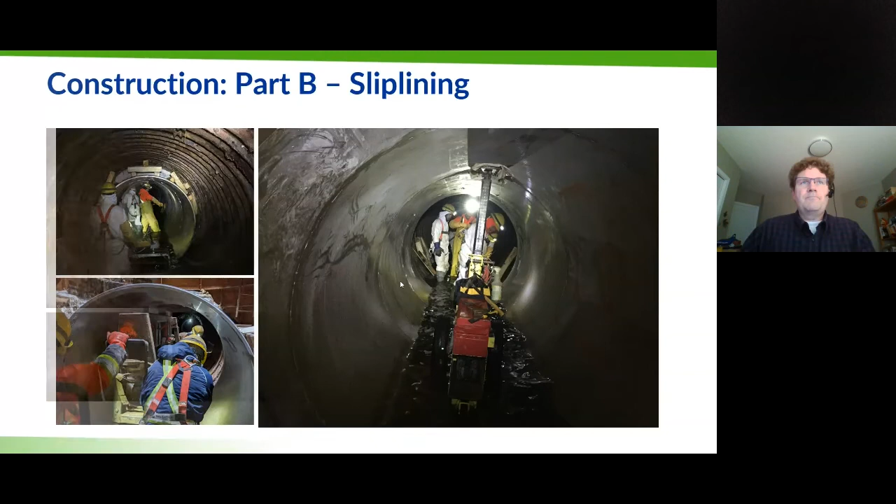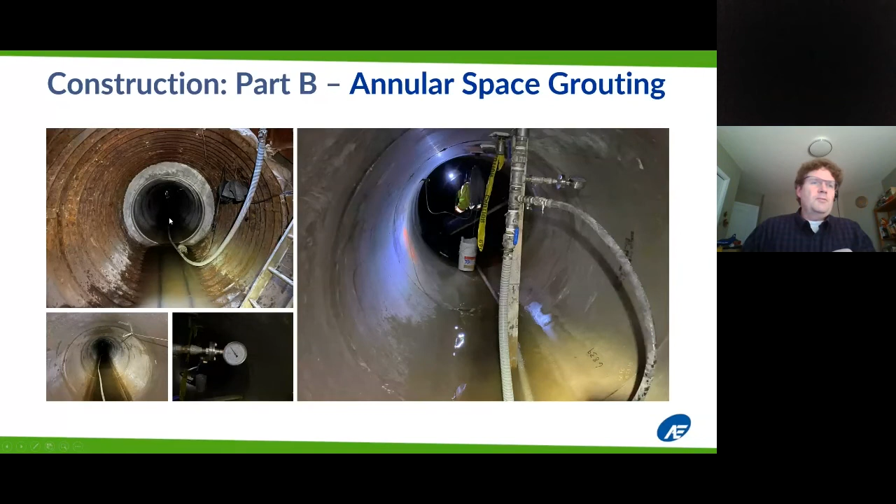So that concludes the presentation. Just a few acknowledgements here. Shanghai Construction, our client on the project. EPCOR would be the overall client that Shanghai is working for. And then from Associated, we got Chris Lamont, lead project engineer, Linda Chaco, Tyrell Stang doing a lot of surveying, Sam Saunders, Keaton Thompson, Deshanka, Caitlin, Mike Polson. Large effort here to get everything working together. So that's it. Are there any questions?

Sure. Well, let's start with Blaine's question. Jason, how did you deal with the sections that were so out of round that the replacement pipe would not fit? Oh, the replacement pipe may not fit. There weren't many locations actually where there was an issue. That was part of when Shanghai went through and did the initial walkthrough before ordering pipe. They were able to just do a mandrel test essentially to make sure that the pipe would work. So that was done through those locations, and then the pipe was ordered so that it would fit through those tighter locations.